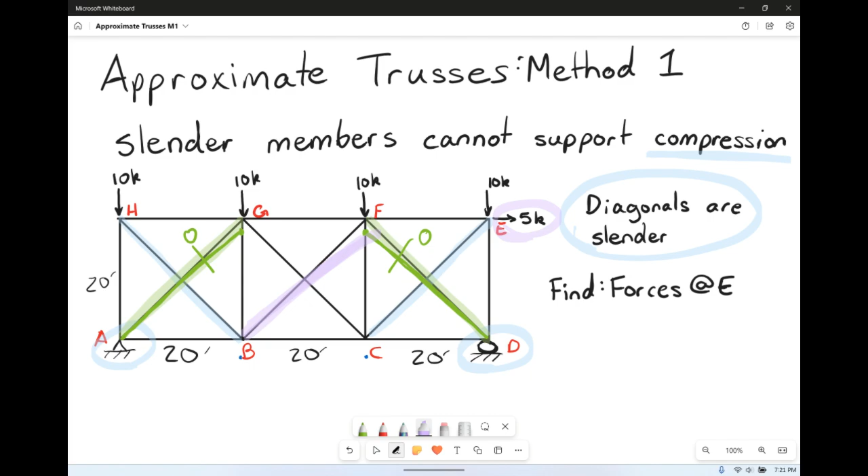And GC is kind of getting squished. If G scoots over here, then that member just got shorter. So technically, GC here is also a zero force member.

I wouldn't really worry about the middle box. You can probably discover all that if you're going through the entire method of joints, but that is the kind of mindset we're going through. So that's where we're going to start with our zero force members.

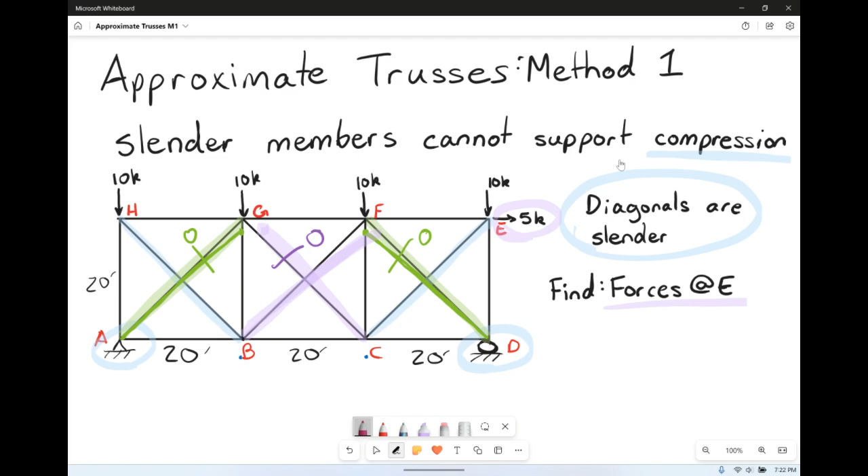Again, we only want to find the forces at joint E, we don't need to do this entire truss. So we're just going to take a cut here so that we can isolate it. Before we do that, we probably want to find the forces here at D.

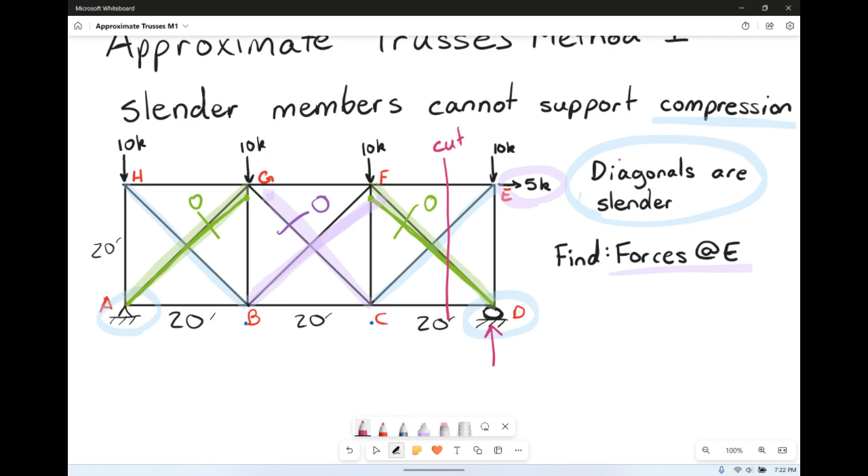So this would be Dy. If I want to find Dy, I'm probably going to sum the moments about A, since he's the only unknown in that case. So sum the moments at A, taking counterclockwise to be positive, setting it equal to 0.

Our first load acts in line with joint A, so he's not actually going to apply because his distance would be 0. Our second one, the 10 kip, is going to act in that direction around A, so that's going to be negative. So we're going to have negative 10 times his distance of 20 feet.

Our second one over at F, again, same thing, -10, but a distance of 40 feet. And then our third one at E, we have again -10, but a distance of 60 feet. That's a lot. Then we have E, and E is going to be going again that direction for that horizontal one at E. So again, negative.

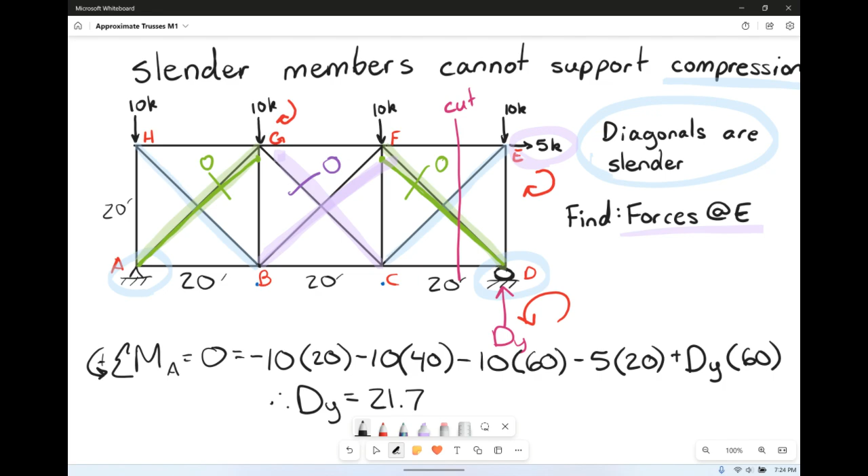So we have -5 times a distance vertically here of 20 feet. And then lastly, we have dy, thankfully going in the positive direction, the one and only. So we have plus dy and his distance of 60 feet. So we're going to find that dy is equal to 21.7 kips. Keeping our 3 sig figs here.

So now that we have dy, let's go ahead and break our little free body diagram out. So we have our vertical member. We have dy we just found, right? So dy is acting up here, dy, this was 21.7 kips. Then we've also got our loads, right? Up at the top, we got our 5 kip horizontal, and we've got our 10 kip going down, our vertical there. We have our angled members, and we have our horizontal members.

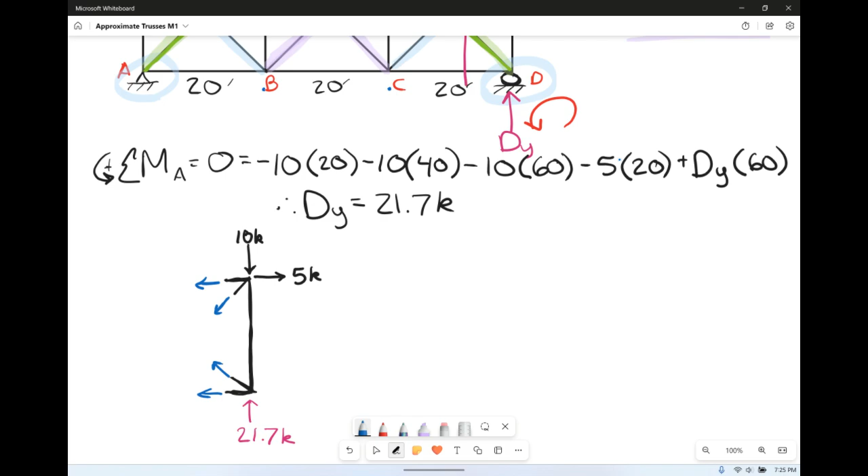So whereas we don't actually need the forces down at D, we might as well solve for them while we're here. So what do we got? We've got horizontally, this is force CD.

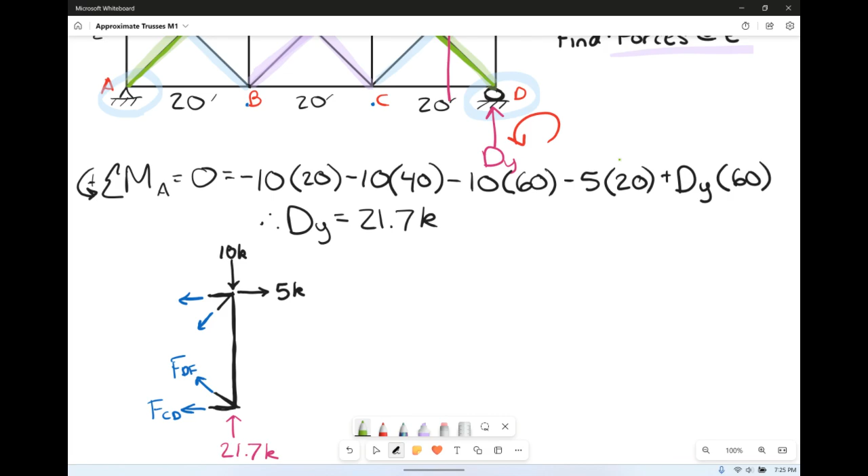Diagonally here, even though we did say he was 0, right? This is force FDF. Again, he is 0, just go ahead and mark him there. Then diagonally we have FCE. And then we have FEF, that's EF.

FEF. Alrighty, technically in here, we also want to find this guy that we can't see, but this is FDE. Or going the other way again, right? This is FDE. So he's technically there, he's just not cut into the member.

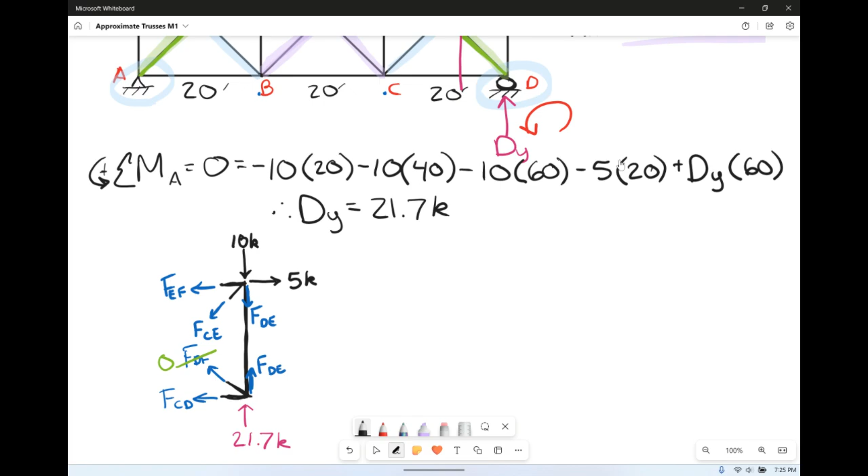So to start with, let's just start analyzing joint D. So for joint D, we're gonna break him out. We have our vertical, our horizontal, and that diagonal, even though that diagonal is 0. Yay. Then we also have a vertical, 21.7. Our vertical force here, FDE, and then our horizontal, FCD.

So if you sum the forces in the x direction, we have only one force, and that's FCD. So FCD is, he's also 0. So that makes that fun.

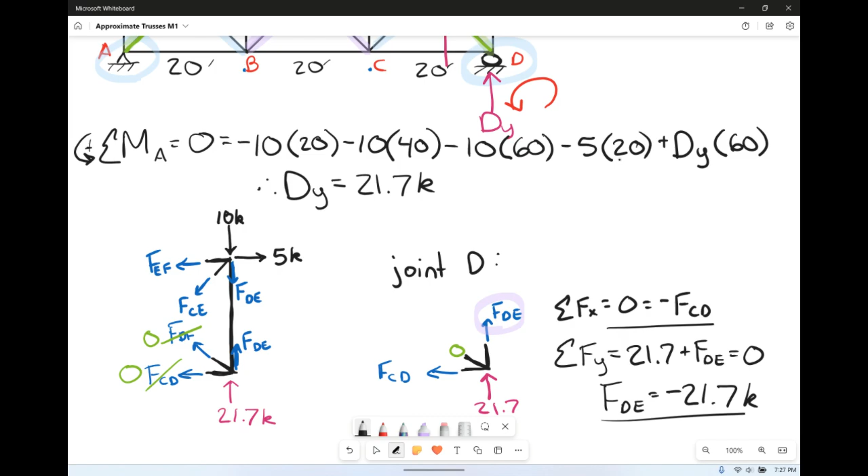And of course, the reason we're starting at joint D is because we do actually want DE, right? We did actually want to find him. So now if you simply sum the forces in the y direction, you get 21.7 plus FDE equals 0. So FDE is equal to -21.7 kips. Now, because he's not a diagonal, he can hold that compressive force. So he is one of our answers that we wanted to find.

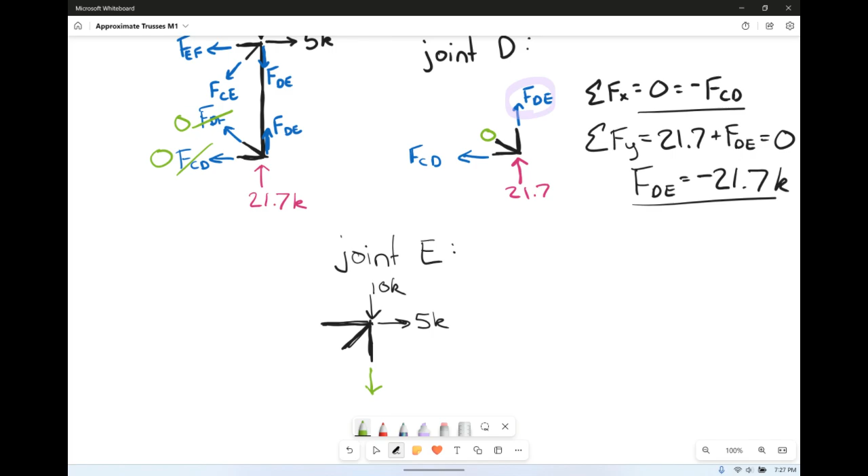And now all we got to do is go to joint E and check him out. So joint E, he's kind of looking the same way. Got a horizontal, got a vertical, got the diagonal. We have a vertical force of 10 kips. We have a horizontal force of 5 kips. We just found that FDE, I'm going to draw him in tension, even though we found he was -21.7 kips.

Okay, we do want to actually keep note of him. Then we want to find FCE, and this guy at the top, this is FEF. So I have 2 unknowns horizontally. I only have 1 unknown vertically.

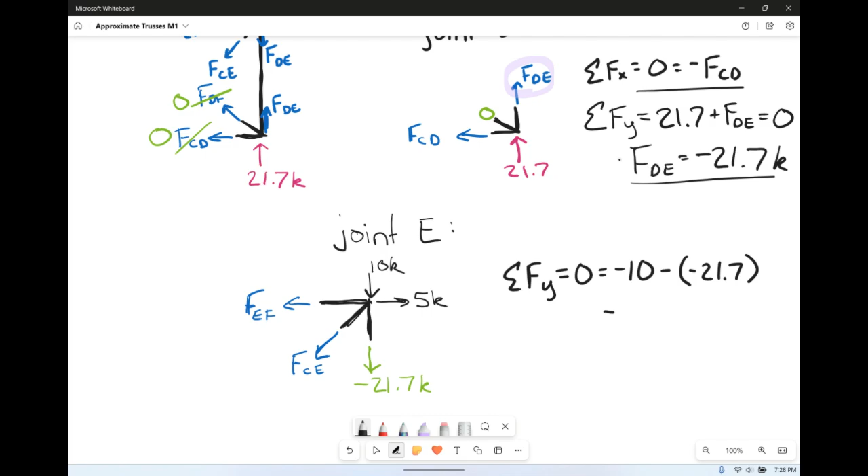So we're going to go ahead and sum the forces in the vertical direction, set it equal to 0. We got 10 going down, and we also, according to our arrows, also have our negative 21.7 going down. So technically he'd be going up, so our negatives are going to cancel out there. We also have our FCE force going down. And again, if we're looking back at our beautiful picture, it's 20 feet, 20 feet for horizontal and vertical. So for our triangle, that's going to give us 20, 20, and 20 square root of 2. I love that guy. So technically his component is 20 over 20 square root of 2 for the vertical component.

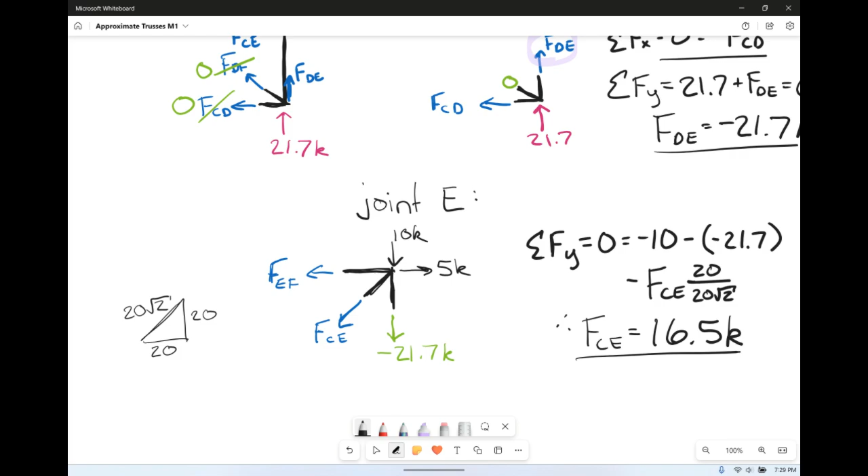So what we're going to get is FCE is equal to 16.5 kips. If you found that he was negative, I would either suggest to check your signs or to recheck whether this guy is actually a zero force member or not, because remember, he cannot hold compressive forces. So if you found a compressive force for a diagonal, you definitely messed up somewhere, or he is actually a zero force member in this case.

So now that we have him, we can simply sum the forces in the x direction and set it equal to 0. We have a 5 kip force positive. We have minus FEF. And we also technically, by this arrow, minus the horizontal component, 20 over 20 square root of 2 of FCE. So what we're going to find is that FEF is equal to negative 6.67 kips, which again, it's okay, he's negative because he is not a diagonal.

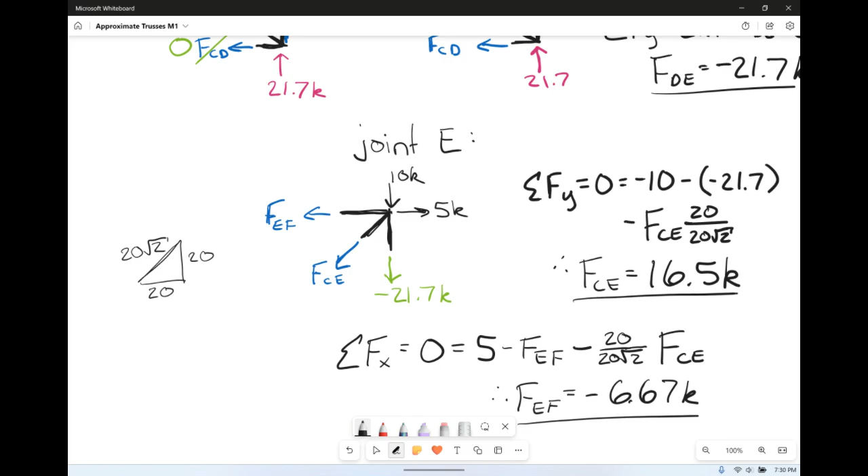So for joint E, finding all those forces, he really actually wasn't too terrible. But again, the biggest thing about this is finding which one of those slender members is actually in compression. Once you've done that, everything else is simple from there.